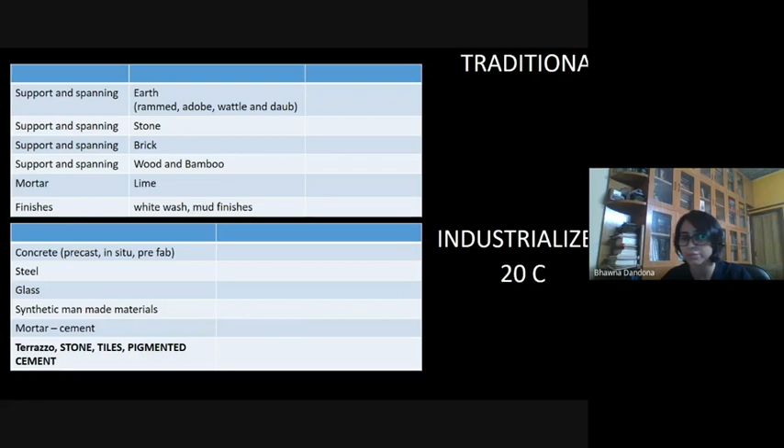Let's see why the traditional materials were so popular. I think apart from the cities, they are still very popular. The traditional materials are mostly the local materials, the materials at hand, which are very easily available. You don't have to go anywhere, you don't have to go out of state to get it, you don't have to go out of country to import it. So these are very locally available. The thermal properties are such that, because they're locally available, and we have the traditional knowledge system, when we use that and put together a building, it's always very thermally conducive for the people. So obviously there are no hidden costs.

You don't need extra heating, you don't need extra cooling. There is always also a comfort to handle these materials by the locals who are using them. So it becomes a craft also for them, and then they start to explore it more.

If we see the traditional buildings, there is always in many cases that I have seen and read about, a resistivity to disasters that a particular area is prone to. We'll go through that later. There is a longevity to these materials - they don't just disappear or deteriorate with time. And they're very economical because you're not going far to get it, and there is local know-how to construct it. The repair methods are also very simple for these buildings, but still we choose not to use them. Why? There are certain limitations, I would say.

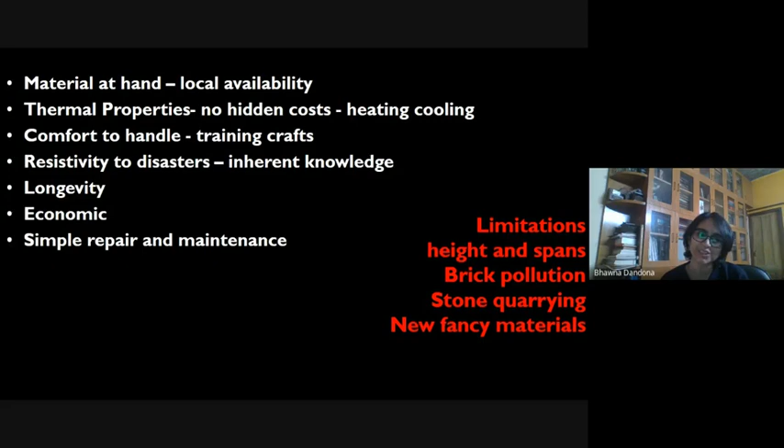I want to start with a very simple, understated material. We use it all the time. It's present everywhere, but we don't give this material enough credit. Next, Aruna, please.

Brick is in India - brick is pretty much found everywhere, when you go from north to south or east to west. As Aruna mentioned in the bio, I received a scholarship to study Lakhori brick, and I surveyed with some of my colleagues - Haryana, Punjab, and Delhi.

We overlaid the locations of brick with the soil that we were finding from the Survey of India maps. It is very obvious that wherever there is this alluvial soil belt, we are finding brick over there, in the same places. So people are not going very far traditionally to fetch their building materials - they are using whatever is present at hand and using it to construct their buildings, which they live in and use for any other functions.

Since the survey was primarily in North India, I didn't go too much into the South, but it's kind of obvious there as well. Next slide, please.

If we don't go into the archaeology part, I'm starting from sort of a medieval period. We had Lakhori brick, and this is not a standard size we are looking at - it's a very generic size. For example, this 95 could range from 80 to 110, this 190 could range from 190 to 210, and 35 could be 45 as well. So there are a lot of variations to this Lakhori, but this has been very well documented now, and it's been published also.

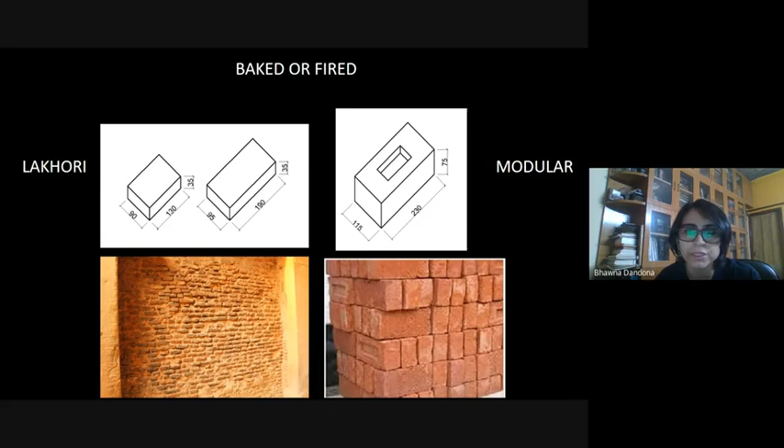Why the Lakhori brick suddenly became so popular around the 10th to 12th century was mainly because the trabeate system of construction was not sufficient. With the Ghurid invasion of India, the intent was to build more massive buildings with less stone, because they wanted to go in for an arcuate system. An arcuate system does not support stone - it supports brick. That's why brick as a building material started becoming very popular around the 12th century, and it remained popular until present day.

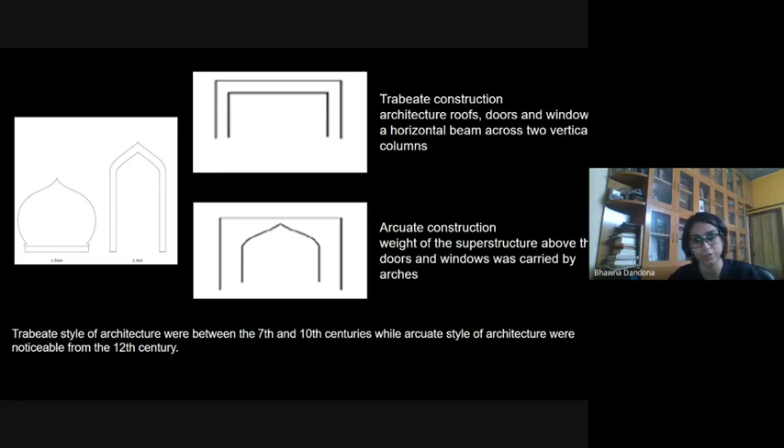Go to the next slide. If you see, this is a miniature painting from Agra Fort, from the Akbarnama. It shows how Lakhori brick - because that was the only thing present at that time - with lime mortar, was being used to construct a wall. It was used in structural elements such as load-bearing walls, domes, and vaults, which forms the premise of the arcuate system, set with lime mortar.

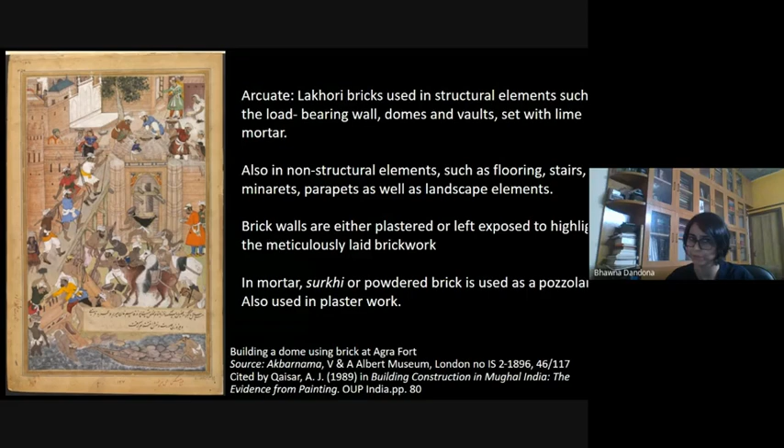It was also used for non-structural elements such as flooring, stairs, minarets, crenellations, and other landscape elements. Brick was either plastered or exposed with nice pointing. In mortar, surkhi or powdered brick was also used as a pozzolan material, which we still use till now - many of us don't even know why we use it, but we do. And it all started around the 12th century circa. Next one, please.

We mostly underestimate brick, and think that it can be used for walls, window openings, sills and lintels. But the arcuate system very well explains how these things were nicely used for domes and all the spanning and roofing systems.

Let's go a little bit deeper into the construction of brick buildings. This is from James Skinner's album.

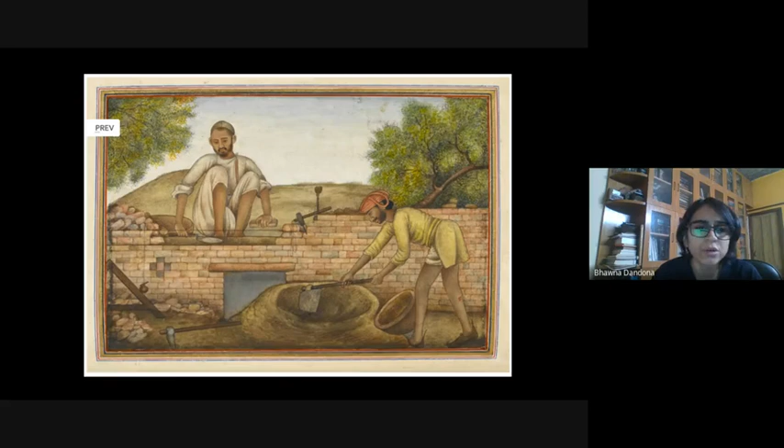Let me put a disclaimer here that I'm not using any scientific facts here. It's mostly from my personal research and some readings that I've been doing. Go to the next slide please.

Mostly when we see brick, we envision it as an exposed brick building, but this is a photograph, this is a sketch from Ebba Koch's book, and this is the compound wall of Taj Mahal. So brick was very commonly used as a filler material also, when you didn't want to show it off, because I think people really wanted to show marble or stone as the main building material. They filled the brick inside and clad it with stone.

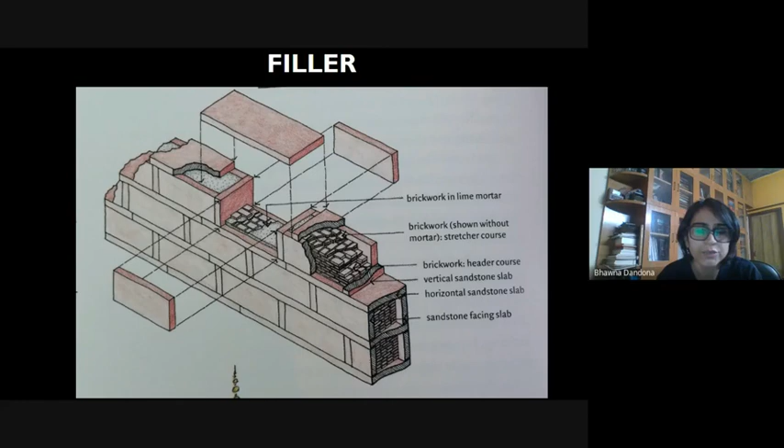This is brick as a filler material, near Humayun's tomb, where you can see the cladding has come off, and inside it shows that there is tiny Lakhori brick present there.

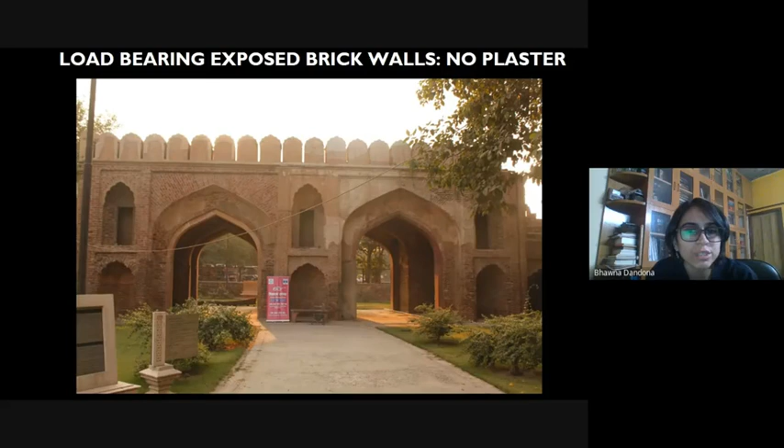The load-bearing walls at Qudsiya Garden in Delhi show beautiful exposed brick, and I don't know if this doesn't change your heart, what will, because this is really a beautiful example. Somebody has tried to put plaster on it, but it was never meant to have plaster - it was an exposed brick building.

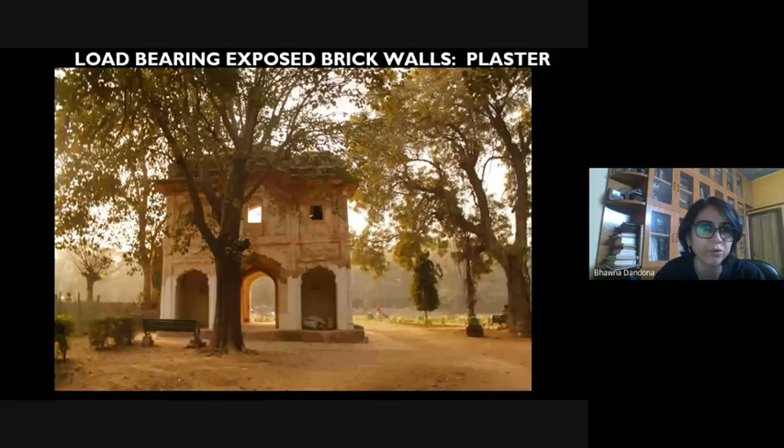Then there is another type: load-bearing exposed brick walls with plaster on it. Maybe the quality wasn't that great, or people were very good at lime plastering, so that is maybe the reason some buildings were plastered as well. So you see a variety in usage of brick - traditional brick as a filler material, as exposed brick, and also as plastered brick.

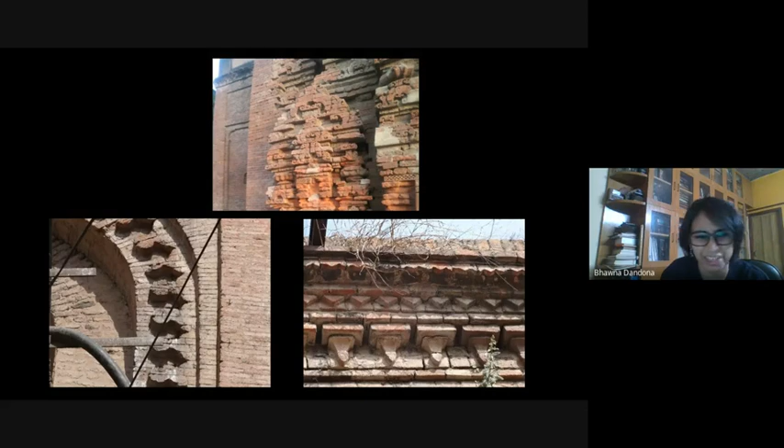Let's not forget that brick is such a versatile material - it's not just a simple rectangular form. It could be molded, chiseled, and there are glazed bricks as well. The top example is from the Kalai temple, the bottom two are from somewhere in Haryana, I can't remember where, and the right one below is a British period building.

I lost you, Aruna, again, because it's very tiny. I can't really see.

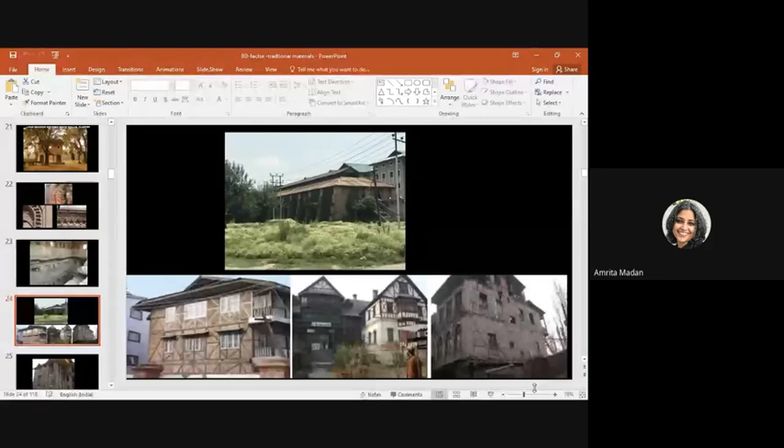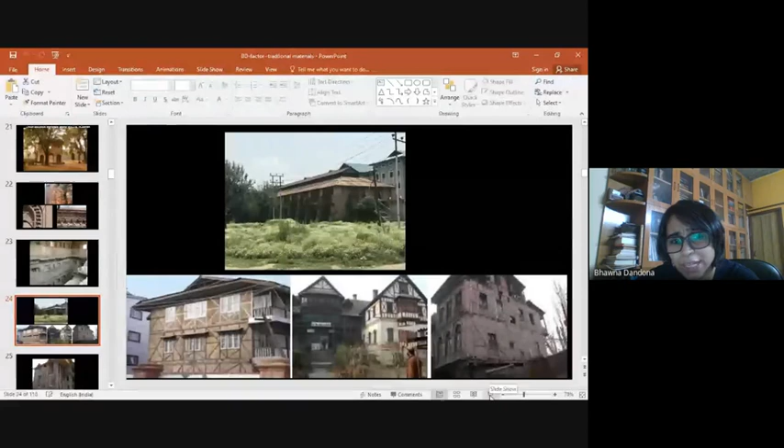So yeah, I was just talking about the lower three slides where the Dhajji Dewari technique is shown, where you can see bands of wood present within the brickwork. The upper photograph shows a mill in Kashmir where the walls are slightly sloping and are staggered or corbelled.

What are these doing to the Kashmiri buildings? These are actually helping provide resistivity to earthquakes. Next one, please.

From the previous slides you can see traditional knowledge being used so well, and suddenly somebody comes and says, I want to make a concrete building, and this is what happens. Eventually we'll see in a few years how these buildings shape up, but this will be a very big disaster. Next one, please.

I'm going to stop talking about brick for now and just think about brick as a building material. After showing these slides, do you think you can make your walls, a brick building, roofing combined with other materials like wood or concrete, using a concrete framework? Openings, you can do sills and lintels with brick. Flooring, yes. Non-structural elements, yes. Decorative elements, yes. Why are we not using it?

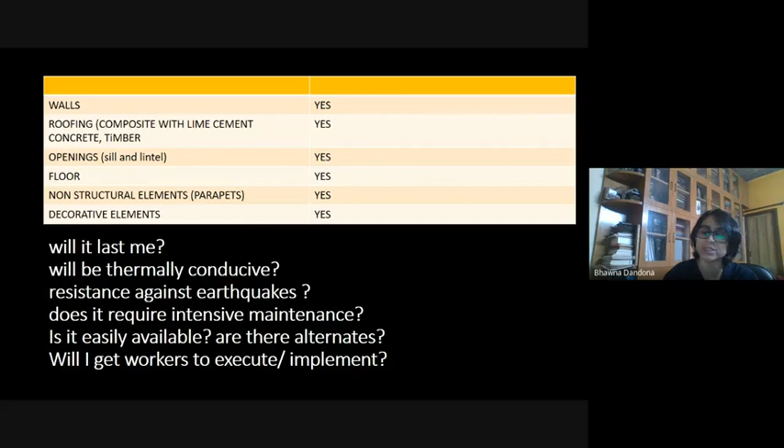I would like to call it rationalized traditional rather than an alternate approach, because it's still not gone completely. It's still very, very present.

I would say these materials—that's the word I was kind of trying not to use, because then you get pulled into whether it's green by X standards or Y standards, but we don't need to answer that question to anyone. This is for our sake that we are doing it. So this is another very sustainable example.

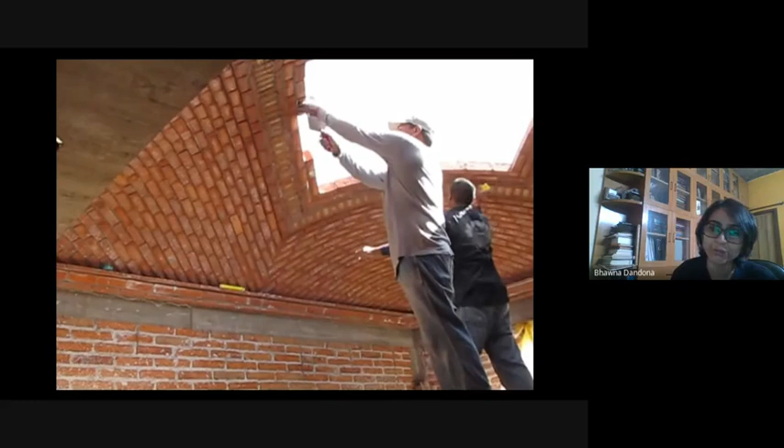Another example of roofing material right here, brick as a roofing material. So what I'm trying to show you here is that if you don't know these things, you are not going to be able to transfer this knowledge to your students or to your clients when you're practicing.

So please go ahead and explore each and every material and have those options with you.

But I'm not sure about these materials. So it will be very, very good if somebody takes these as research projects and start to look at comparing the Lakhori to modular to the machine made brick and with these, and their properties. And then maybe we can have a scientific way of showing the clients what is good for their building and what is not.

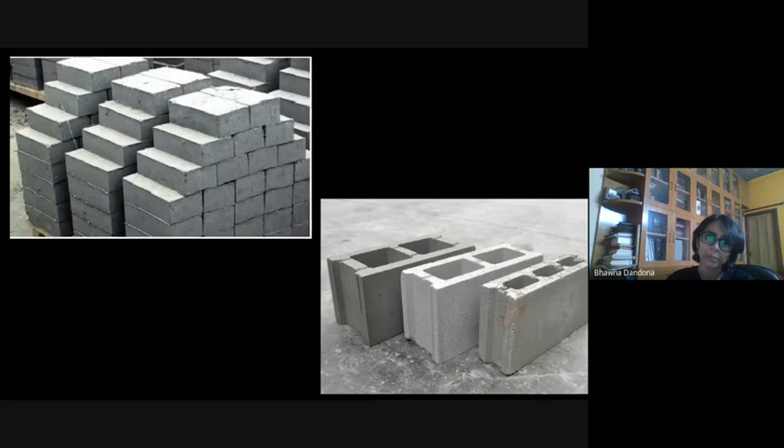So brick will last centuries if maintained well, especially if it's regularly pointed. It needs just your love and care. So I think I would just say go ahead and promote it as much as you want.

There's another material that we don't talk about very much, especially in certain parts of the world or maybe in the cities. But this has been even used before the brick actually came into existence, because fired bricks were not very common earlier.

Of course, we have to make sure what climate we are using it in, and whether the use is external or internal. For example, it's a great material for dry climates—it's obvious, right? Because it can't stand a lot of rain. And as you can see, in India, we've been using adobe and rammed earth for centuries.

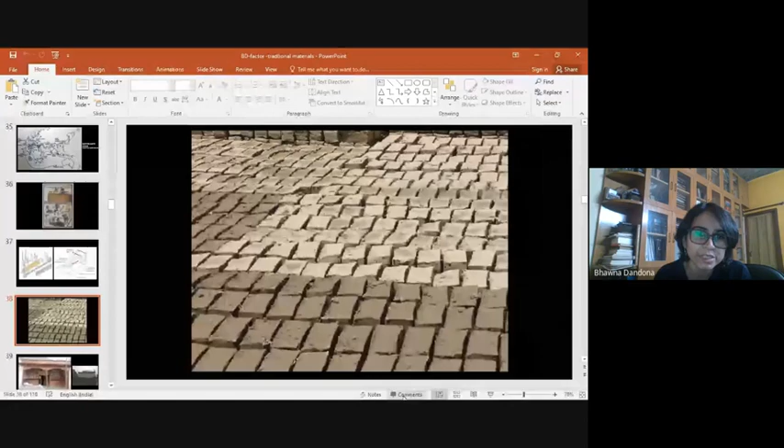So it is a method where the walls are built in phases or stages by putting material into a framework and ramming it, then lifting it for the next layer to be installed. It's a very stable method, and the slenderness ratio of the walls has been tested. It's very structurally stable.

The next method that earth uses, in India we've been using, is the adobe blocks. It's a very different composition from the rammed earth construction I just showed you, but what it provides is ease of construction, and it's also from the same region. These two examples I've shown you are from the same region of Ladakh.

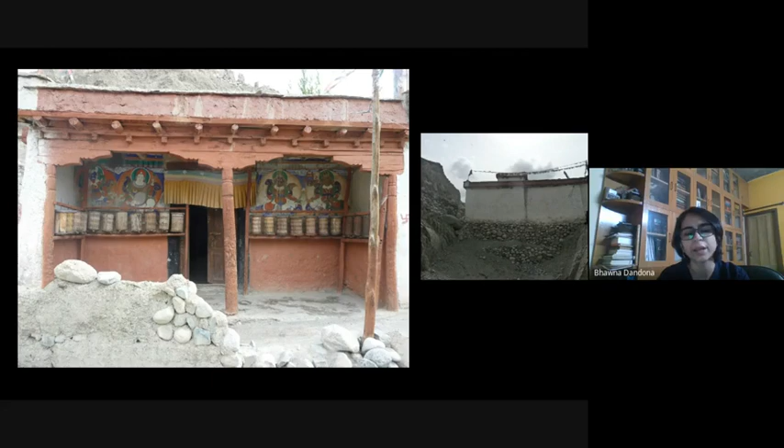This is a building from Ladakh, a small village temple in a village called Tia. This shows the earthen construction that this building has used — it's a rammed earth building.

This building is about 800 years old. In the front you can see all the detailing. It uses wood as a support system. It has walls made out of rammed earth, but it's a composite building which uses two materials.

You can see that all the beams are being projected out. On the right image, you can see the side of the building — the front is on the left, and the side is on the right. It's a single-storied rammed earth building that uses timber as a support material, with a parapet present on top, nicely detailed using some stone coping.

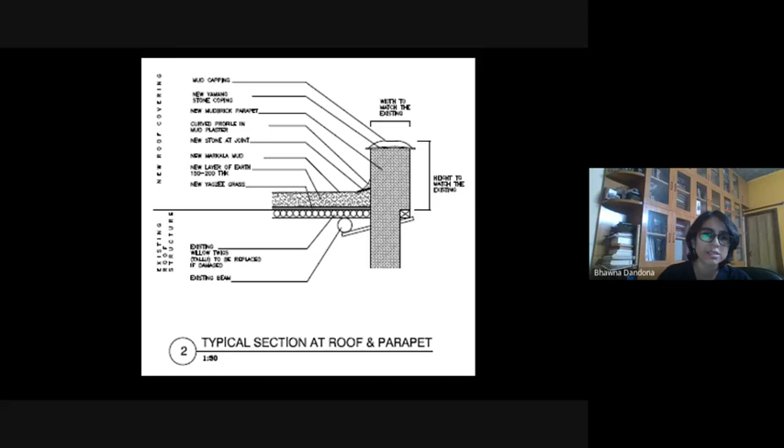The most interesting part — I have documented this building because we were going to do some conservation procedures here. Trust me, this building has lasted 800 years, but it only started to deteriorate in the last 50 years because of recent climate change and the precipitation this area started receiving.

So in order to repair it, we had to figure out how it was put together. That's the most interesting part for me — the investigations. We went into the terrace, dug a hole, and figured out all the roofing layers, how this building was put together, and some from the bottom. We were able to get these thicknesses.

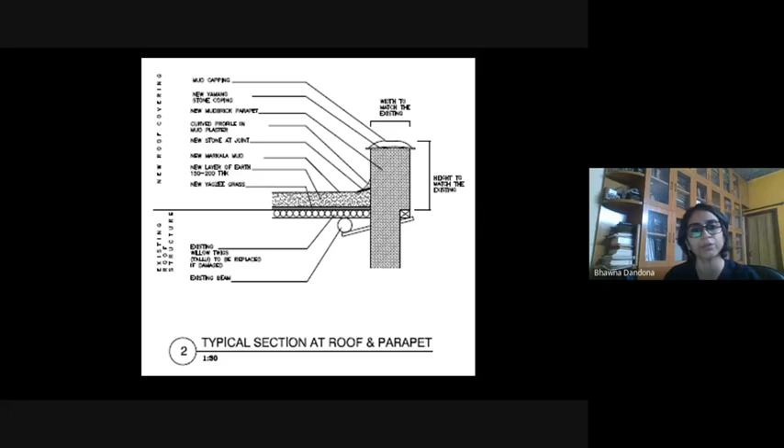This shows a beautiful traditional building put together using rammed earth, wood, and some stone. This section was documented, and then we were able to actually remake the roofing, because it was very deteriorated and the rainwater had spoiled the roofing layers.

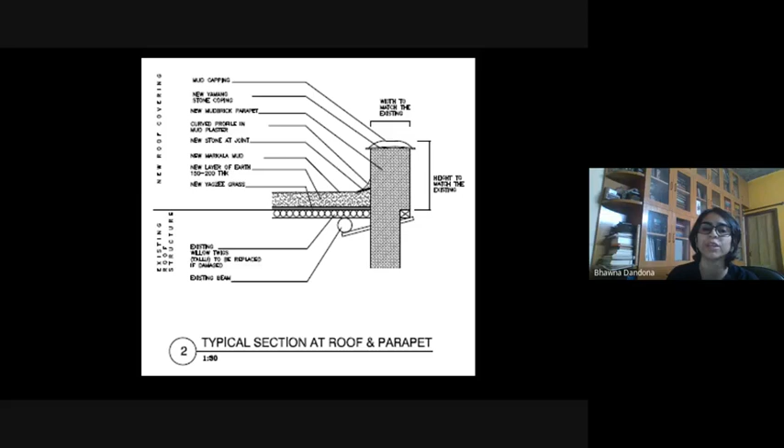If you see the lower part — I'm sure you just saw the previous slide where I showed you all the beams — all the beams are at the bottom, then there are several layers of mud, which keeps the building very warm during colder weather.

After that roof repair was done, I went back again in 2010 when the flash floods had taken place. We were doing an assessment of heritage buildings there, and we had some observations.

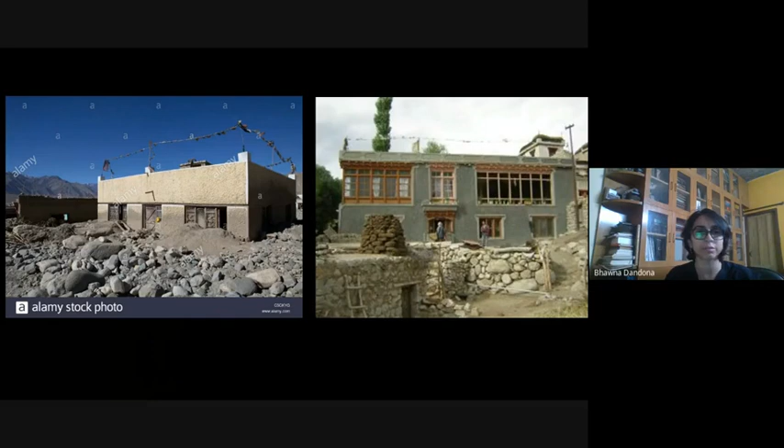So how uncomfortable. I'm just showing you some buildings from the past and some current ones.

This is also right after the flash floods. There is a building owner on the right side who had an old building. He constructed a new building on the left side, thinking that concrete is very fashionable or current, or that he didn't want to repair his old building. He moved into the new building, spent a few years there, and now he's using the building on the right again. What does this really prove?

It only goes to prove that these materials have stood the test of time, and they are locally available. There is know-how to actually do this, and we are all returning to the traditional, to the past.

I think there was some connection issue. Bhawna ma'am, I think, lost the connection. Okay, we'll wait for her to join back. Oh yeah, she's just coming back. No, we'll wait, no problem. This is part and parcel of our present platform, not an issue at all.

Welcome back, Bhawna. Sorry, it never happens, but doesn't matter. Okay, yeah, you continue, let's go to the next one.

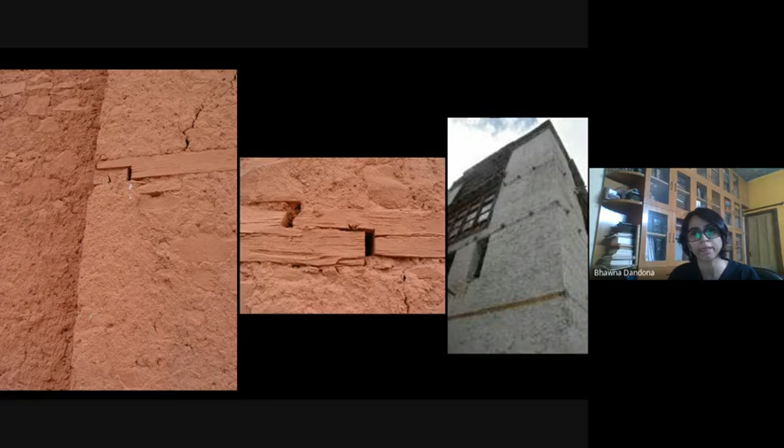Did I change your heart a little bit? Do you like earthen buildings more now? I really have a big fascination for this kind of architecture. I've been working there since 2004, made many trips, documented many buildings, seen the deterioration of many buildings, seen concrete come up. But I wonder whether this concrete will last there, or will people go back to what they were using. We can see that it's happening.

I would like to ask you some questions, or something for you to think about. If you were in this particular area—I'm not saying you start building walls of mud in Delhi, but students will go to places and construct these buildings—would you consider this a traditional material? Would you make walls out of it? Would you do roofing combined with wood? Would you have openings made in these buildings, flooring, non-structural elements? And do you think it's going to last?

These have lasted for over 1,000 years, more than any other buildings. They are almost like archaeological remains now, but very living buildings—people are still using them. Is it thermally conducive? Yes, more than anything else. Does it provide resistance to earthquakes? If we don't learn from these, then I don't know what we are going to learn from.

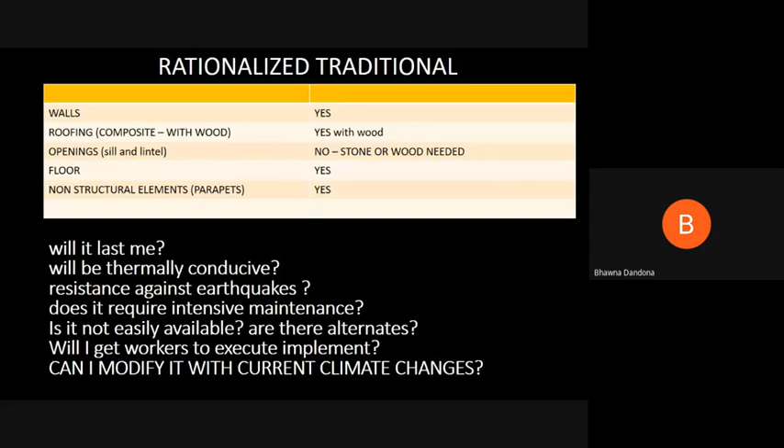Sorry about that. Yes, the local know-how is still available, and it's very easy to maintain. But the climate is changing, like I was just mentioning, so maybe we'll have to adapt and improvise it, not change it completely. We don't need to change anything completely.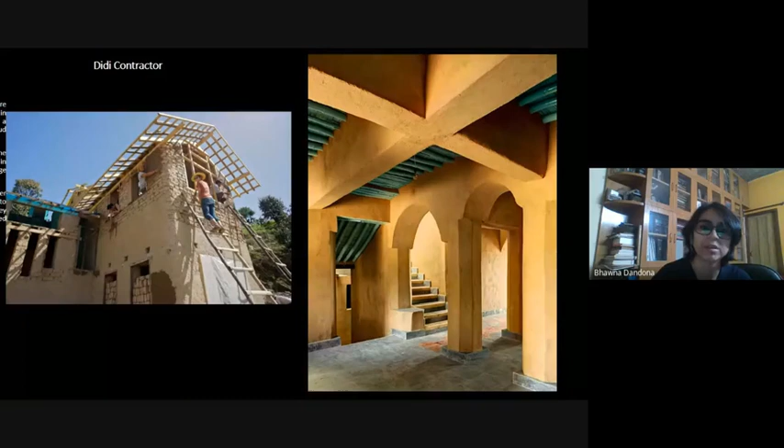You can always stabilize the soil or earth you are using, and you can have design elements, proper slopes, so that your building doesn't get damaged. So you don't have to worry about whether you're using soil, earth, or stone—we can make it work. This is also Didi Contractor, inside of a building.

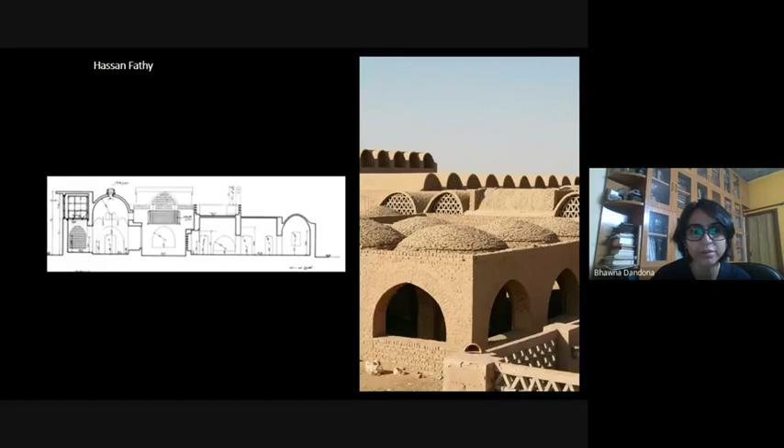Hassan Fathy, of course, we all know. Thanks, Aruna. A lot of domes are also in use here. More Hassan Fathy for you—excellent construction, especially for slightly arid climates, not so much for rainfall.

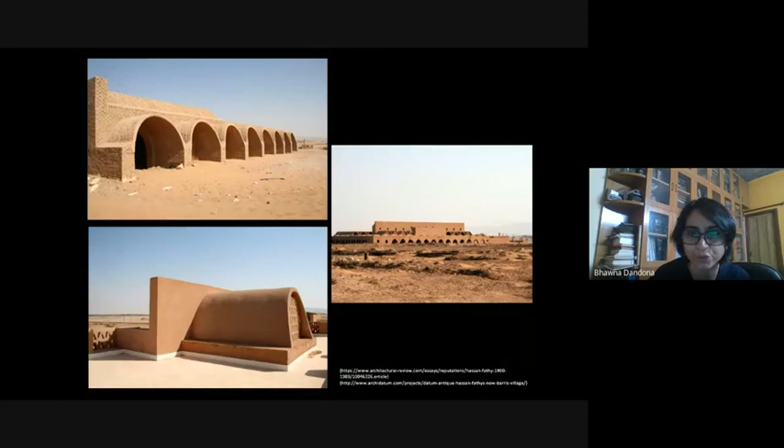Skilled laborers are available, especially in the region I'm talking about, and they're not afraid to learn. Some have come from Bihar and other areas in the east and north, and they are also learning these techniques.

After the flash floods, Seeds and many other organizations were working there. Initially they said they would do newer construction, but eventually realized it wasn't working, and people were sleeping outside. Then laborers were trained and were very happy to learn. Some were already skilled, others were trained. There's no harm in that—why do we shirk from training? We have to do that.

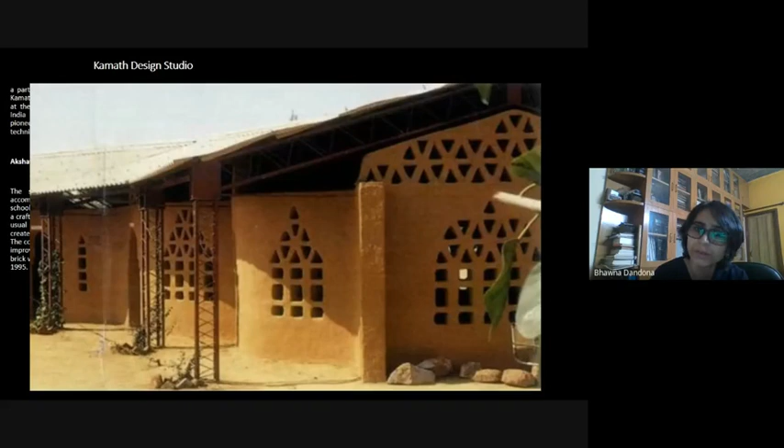It's also not very expensive. At least for the examples I showed you, it was not expensive.

Hunnarshala is taking a lead in making mud bricks and restoring buildings. They're also going to Yemen and some parts of Africa, right from here in India, in Gujarat.

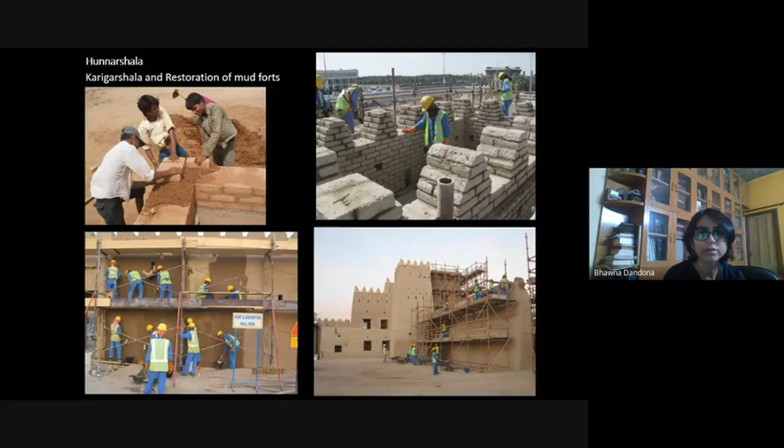These are not earthen architecture examples, but I came across them and thought of Anupama Kundoo, who also comes as a visiting juror for SSA. She has explored earthen bricks, earthen tiles, and fired earth in many other forms. You can see these roofs and other buildings by her.

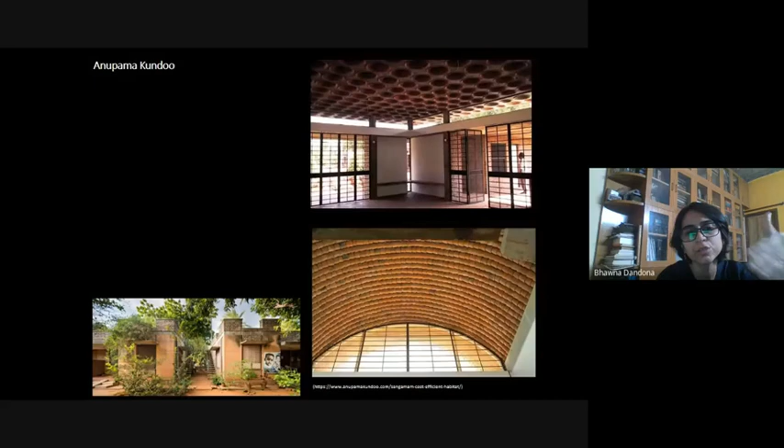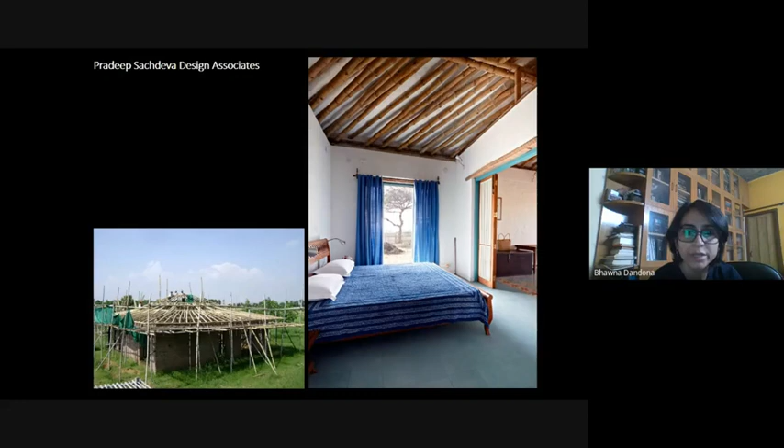Bamboo being used in Pradeep Sachdeva's design. This is earth sort of over—we are going on to the next one now. These are some examples of contemporizing, or using traditional materials in today's lifestyle and current situations.

More bamboo, more Pradeep Sachdeva—I think we had somebody from their office yesterday. Anil Laul has very sensitively used stone and bamboo as well. I'm not talking about stone today.

Some examples from outside of India, from Vietnam.

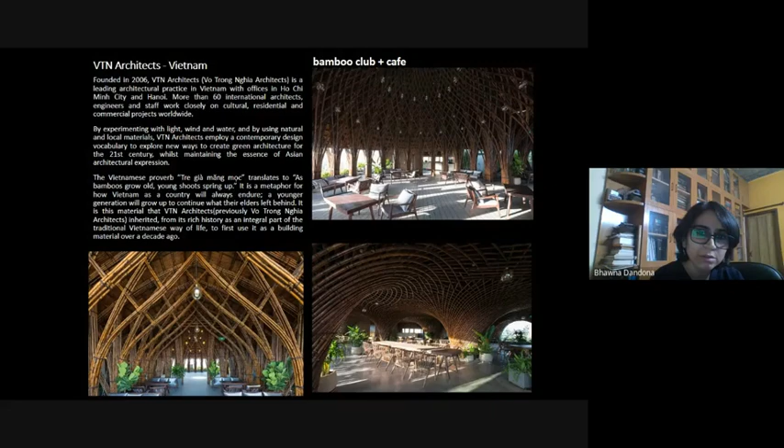Sanjay Prakash—some examples from his buildings. He also talked about concrete-less buildings. I would like our students to actually try some of those, given an option, and not just talk about everything that is current and advanced. We of course have to learn that as well, but let's not forget what was there.

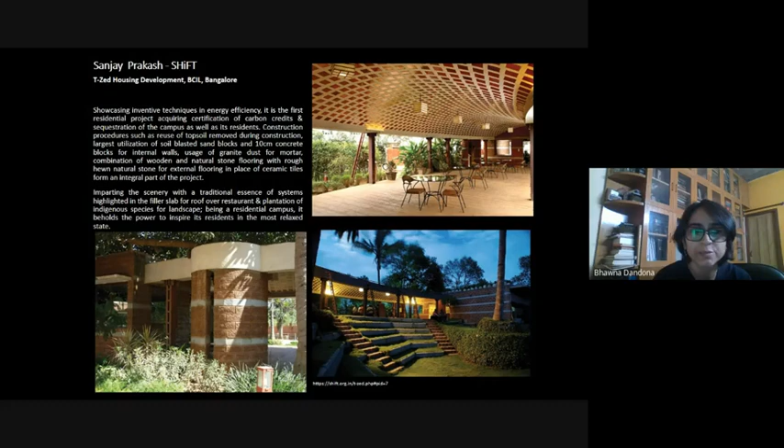Some examples from Vietnam—it's happening, that's what I'm trying to show you. More bamboo, very contemporary, very simple buildings.

This is one of the last materials I'm going to talk about, and I wouldn't say it's a traditional material as far as the Indian context is concerned. It's not traditional and it's not from India—it was not found here, it was not made here. It's sort of a transnational cultural exchange for us.

It came with the British—a material brought to India by the British and then used very successfully in large public buildings. I'm calling it a traditional material now because it's not very industrial and uses a lot of natural materials, not synthetic. I wouldn't say it's the same as earth or brick, but it's not so far away from it either.

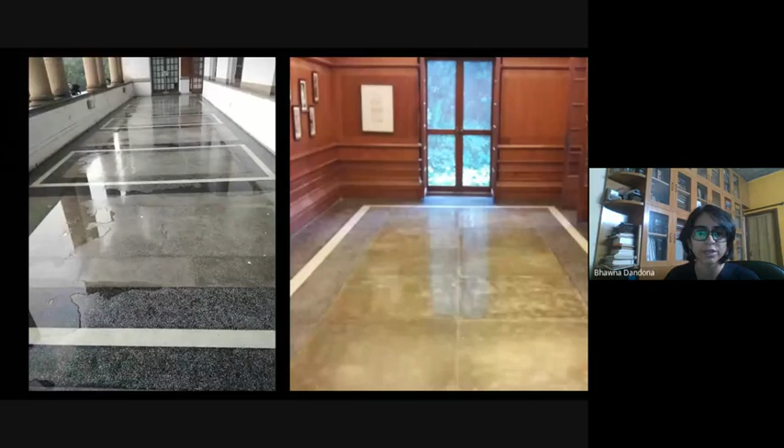This building is Teen Murti Bhavan, and it shows some very beautiful terrazzo. We went into details of the aggregates, the color, and the size of aggregate for the paper, but this isn't just about that.

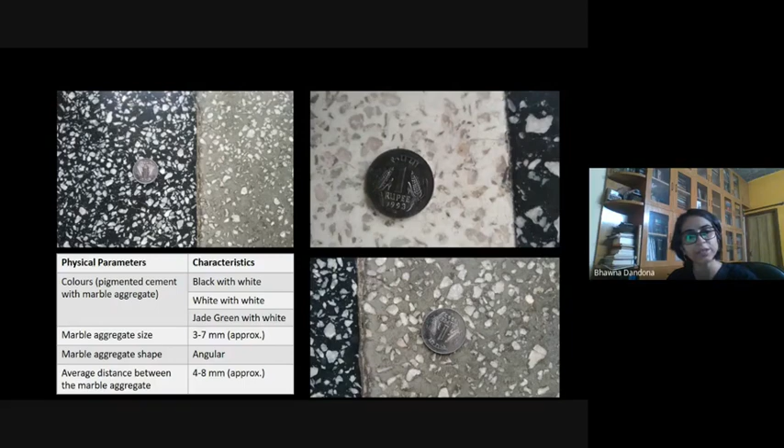Another room in the same building shows terrazzo details, done in combination with cement—it's not just terrazzo, it's a combination of cement and terrazzo.

This is the All India Radio building, also made of terrazzo. I'm talking about public buildings right now, but I'll come down to residential, smaller scale buildings. This is how terrazzo actually made its way into India, first with larger public buildings and then into smaller residential buildings. If you see the image on the left, it completely looks like stone, granite and maybe some yellow stone. On the right, it's amazing what terrazzo can do, the sensibilities and the workmanship.

This is Sir Sobha Singh's house, or the Hungarian Cultural Center, which uses beautiful, colorful terrazzo in Delhi. All these examples are from Delhi for terrazzo. We did not go elsewhere for this.

When we were doing the investigation, we were looking at all the details of the color, trying to color match it, and looking at the problems and cracks, which we are not talking about here. But when you're looking for a material, when you're doing research, you have to go into the depths of these details.

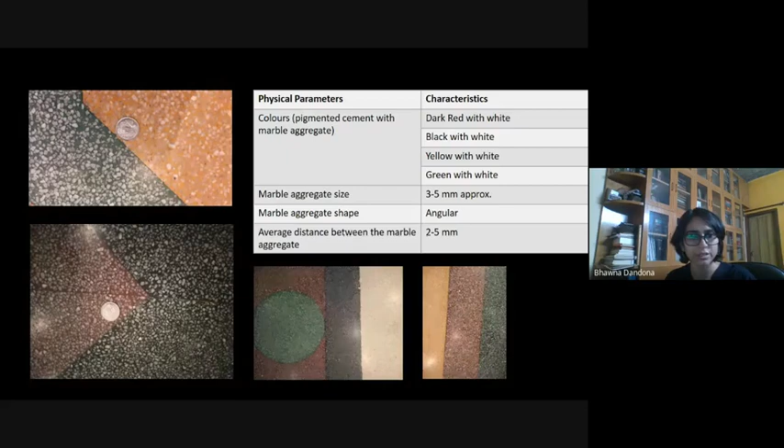Another example from the turn of the century, in the 1950s, is the American Embassy, where terrazzo left the floors and became a cladding material. These little screens you see here are not a traditional material, but it was a very big material during the 1950s, or the mid-century period, for buildings in India.

These are examples that I really love, from Delhi, Daryaganj. Two of our students are doing some really great research and they call themselves Deco Delhi, and these photographs are from them. Terrazzo was very generously used in buildings after their use as public buildings, because the know-how came, the craftsmen were trained, and this is a versatile material.

This is a building in Chandni Chowk, also terrazzo. If you see the courtyard.

Stairs in terrazzo. They do have some cracks and some weathering, but leave it to us to repair it.

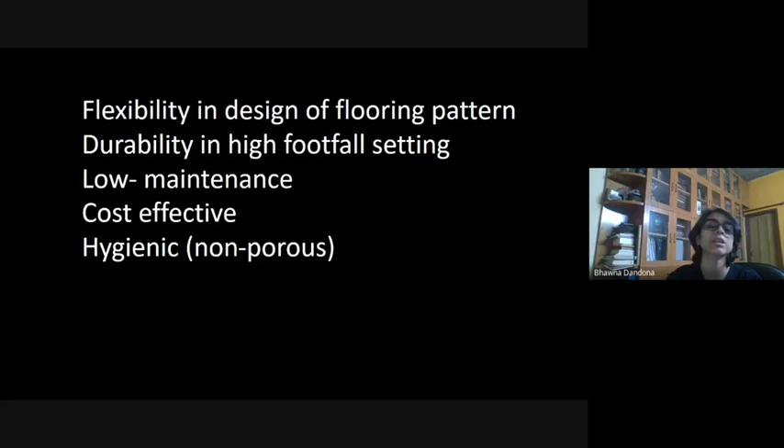I like to call terrazzo a natural material, though it's formed by using man-made interventions. It's natural because it uses a lot of leftover stone, mixed with a cementing material. You don't always have to use cement; you can also use lime or white cement. There is flexibility in design and durability in high footfall settings. You can't always use stone, you'll run out of it, which is why we go in for synthetic materials. Why not use this? It's low maintenance, cost effective, and very hygienic because it's non-porous, it will not absorb water. So what I'm trying to tell you is that industrial materials, or everything that came with concrete, may not be very traditional, but it can still be continuously used. We don't have to deter from using it.

This is a blog from Bharat Flooring and Tiles. When we were doing the research, we came across this very nice blog that my colleague helped me find. They blog about terrazzo every day. There is Art Deco Mumbai, who also talk about terrazzo, and the Deco Delhi students are talking about terrazzo too. It's making a comeback in a very big way, and it's a very reliable, forgiving material. It will last you a long, long time.

Bharat Tiles, the company, is also actually encouraging people to use it by showing some examples. They call it the terrazzo trend. These are contemporary buildings where terrazzo is being used in recent times—this is a building in Goa. It looks really cute, fancy, and contemporary. It's not a traditional material like other traditional materials, but it is a very sensible material to use.

There is an organization called the National Terrazzo and Mosaic Association, based in America, which gives a lot of literature on terrazzo. It could be very good teaching and learning material, and they have lots of workshops as well. They actually give step-by-step procedures of how to install and make terrazzo. And look at this beautiful terrazzo.

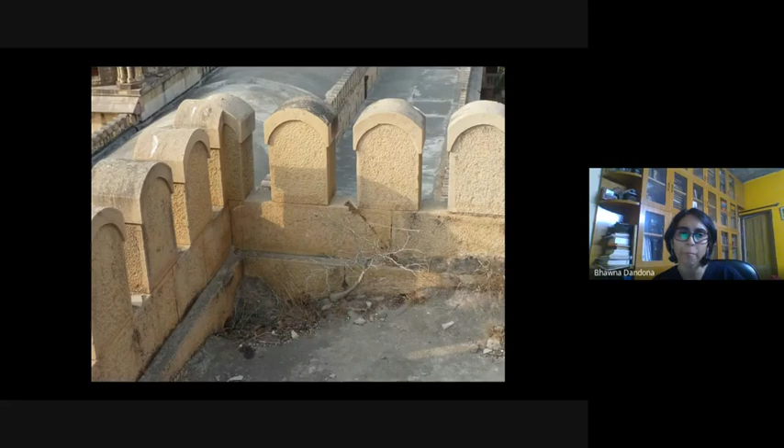This is also Muir College, the image right here on the screen. It shows that the gutters are completely filled with debris, and there is plant growth. And when you go inside the building and say, well, there is water seepage, the building has become old - the building has worked for 200 plus years. What else do you want from the building?

You are not taking care of the building. So it's not about the traditional material, it's not about the lime building, or it's not about the know-how. We still have the know-how, and people are getting trained.

We sometimes just forget, we make the building and we forget about what will happen, how will the client use it, and what they're supposed to do every month, every few months, or every years. How many times do they have to paint the buildings? How many times do they have to repoint the buildings? So it all comes down to maintenance. Somebody over here just forgot to clean the gutters, and there's a bird nest right there, which doesn't let the water go down the right way, and it will start seeping all around the joints.

Brick building - because right now I was all gaga about the brick buildings, but brick does also have some issues. On the left is the quality of the brick, efflorescence, which is the deposit of salts on the building. It only happens when the bricks are not of good quality, or the water used to construct the brick has salts. So you have to make the choice very clearly, not to use a B grade or C grade brick. So it's not about brick, it's also about the choice that you're making.

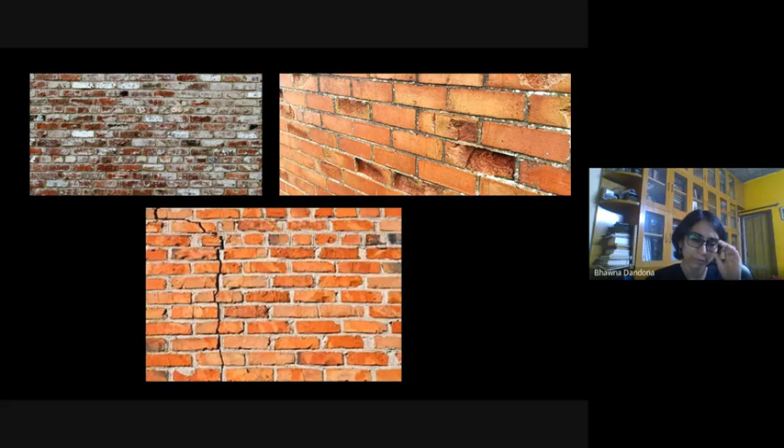On the right shows the spalling of the brick. There are very technical reasons for that, so that's not for this presentation. Below, the image on the bottom shows a little bit of crack, and it's not very severe. It's also because the building hasn't been pointed very well in the past.

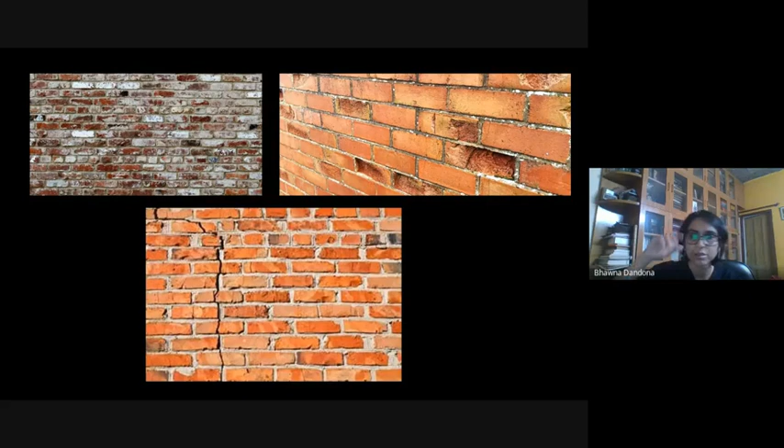Mostly, I think, apart from the lack of maintenance of the traditional materials and aging of the material, there are design flaws, or sometimes we try to over-design some buildings.

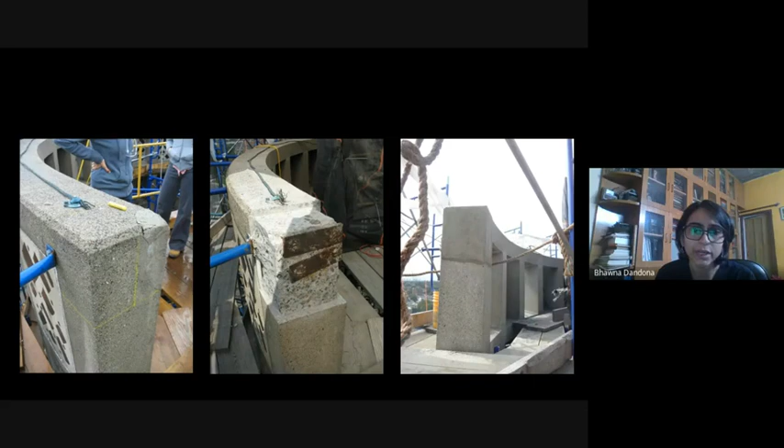Yeah, but it's repairable. I'm not saying you're going to demolish a concrete building if it's not traditional. This is one example of a building in New York I worked on, the Hall of Science. The picture on the far left shows the areas that were coming apart because it's exposed, outside. Then it was all taken out and repairs were made, shown in the image on the extreme right. Eventually it did work out. It works out always. It's not like we can't handle concrete. We can handle all materials because we invented them.

Lately, there has been a drive to save some concrete buildings, under the Keeping It Modern grant by the Getty Foundation. Because when initially these buildings started to fail, people thought these buildings would last forever. They started to fail and nobody knew the repair methods, how to put it back together, and how to make it last and maintain it.

Even when I bring in Corbusier again, when he was making the building, he was not evaluating what will happen in 2020, when I go back, when Bhawna will go and look at this building and say this building has a lot of problems. Nobody foresees that, and you don't have a maintenance plan, and you haven't evaluated that material, maybe in a lab, taken a sample, run it through water absorption, run it through rains, run it through freeze-thaw cycles, and then see how it will actually withhold the test of time, whether it's a good material for exterior or interior. We have to do that in the background. We can't just apply it.